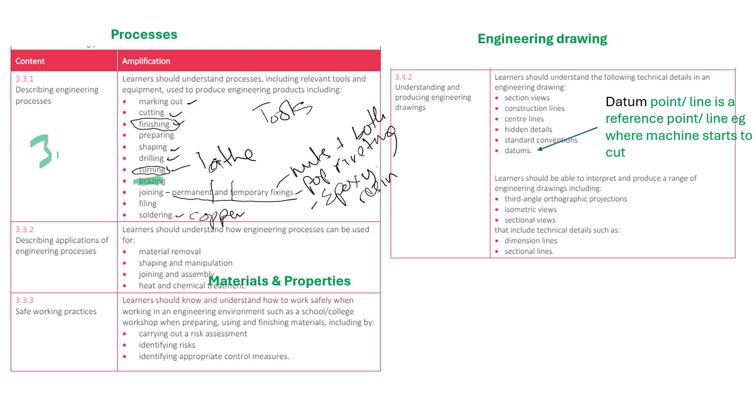The other thing we looked at is this topic about processes, describing application of engineering processes, knowing what processes are used for removing materials. We looked at drilling, turning, filing, and ways of cutting - all ways of removing materials. And then we've spoken about shaping and manipulation, joining and assembling components, whether temporarily or permanently, and heat treatment. We haven't gone through heat treatments in length, but we gave an example about heat treatment being used to improve strength of materials.

Now, one that we looked at was called quenching, and what happens here is you heat metal to a very, very high temperature. You don't want it to melt, but it just reaches that high temperature, and then you drop it in cold water, and that process is called quenching.

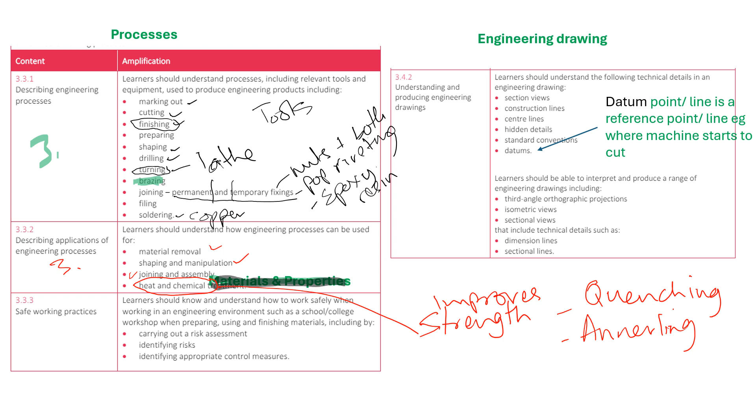But we also have another process called annealing, where you'd heat your metal again to a high temperature, but this time rather than dropping it in cold water to quench, you just cool it slowly, very, very slowly. Some of these cooling processes take time and can be prolonged, but they cool it to an extent that sometimes it reaches the temperature it was before being heated, or they want the temperature to drop even further below than the material was before it was heated. These treatments are called heat treatments, and they improve strength and harden materials - to make the material even harder or stronger than it was.

Now, when it comes to this next topic, which is about engineering drawing, we looked at sectional drawing, which I've given you handouts for. Sectional drawing really is where it shows if a piece of item has been cut - how do you identify that a piece has been cut, and how do you show where a saw blade has gone through? You do that by shading it to show where the saw blade went through. So we looked at sectional viewing.

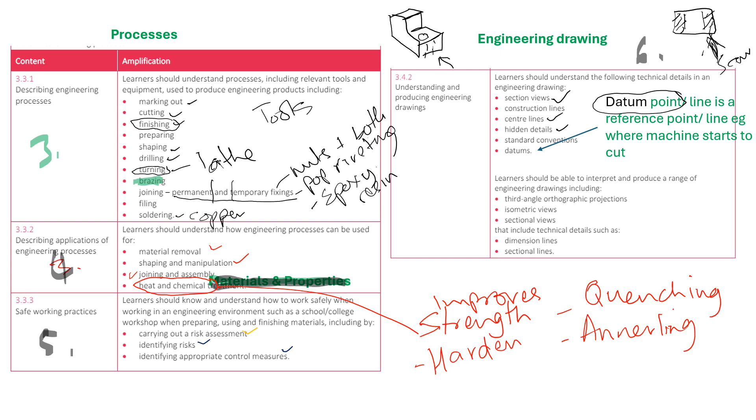Okay, so we're going to start off by doing an exam question. Again, this one is about looking at developments of technology, the influence of engineering in the development of smartphones and smartwatches. I'm just going to give you about 8 minutes to attempt this question on your own, and then we'll get back to it and do it all together. So when you're ready, please stop the PowerPoint now to attempt this question - 6 to 8 minutes would be enough to complete it.

Okay, so make sure you've got a green pen so we can go through this together. Now the question says: the world of engineering is greatly influenced by development of technology. One area that has seen many changes is the use of smart wearable technology. Your task is to discuss 3 significant technological developments that have contributed to the development of watches similar to those shown above. First, you're looking for 3 technological developments. To answer this, I would list those 3 significant technological developments.

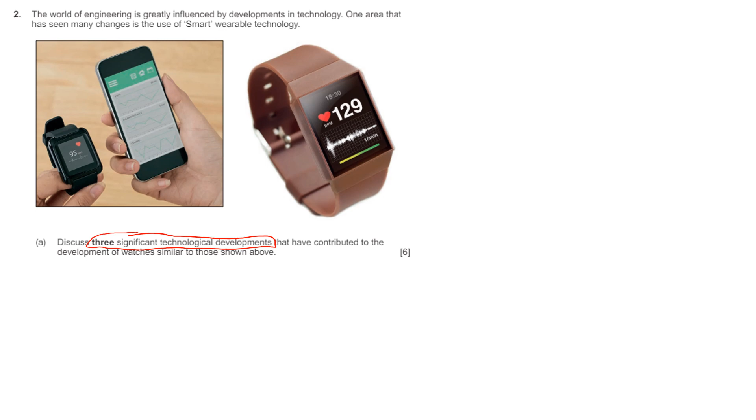Obviously we're looking at smart materials, because if it wasn't for the smart materials on those screens, we wouldn't be getting anything like touch screens. We wouldn't be able to use touch screens on mobile phones. But also, at the bottom here, there's a technology that allows infrared or laser that we use.

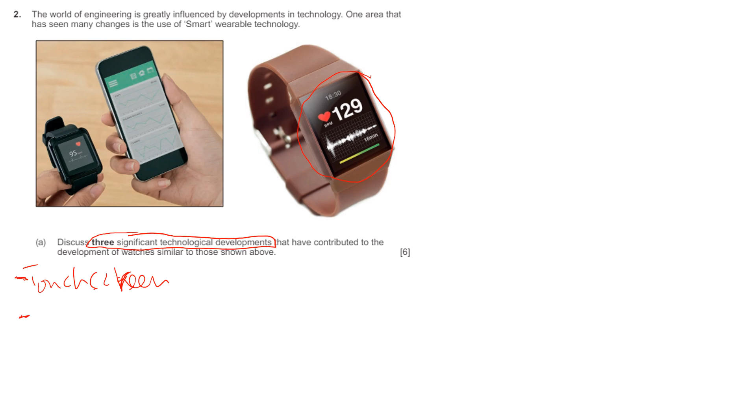That allows you to gauge and measure your heartbeat and so forth. So this is what will come up. Being able to connect mobile phones over to watches has meant a great change in how we use watches nowadays. You don't have to try and pull your phone out when it's ringing, you can just answer through your watch.

We also know that the user can look back at their progress on the applications, or on Bluetooth or Wi-Fi. So again, you don't have to use your phone. We can see how you've been working out all day, how many steps you've done, just by looking at your watch without having to necessarily use your phone.

There's GPS as well that has been used with this technology, which then records your movement. Some sports people do use this - if they're playing football on the pitch, they can use the GPS technology to see how far and how much they're running on that pitch, and which area of the pitch they're spending most of the time on.

We've got where the user can track their routes accurately, and it tells you, you need to start walking, you need to do this, so you're able to track and see how much you've done in a day, without necessarily having to write it down. It does it for you automatically.

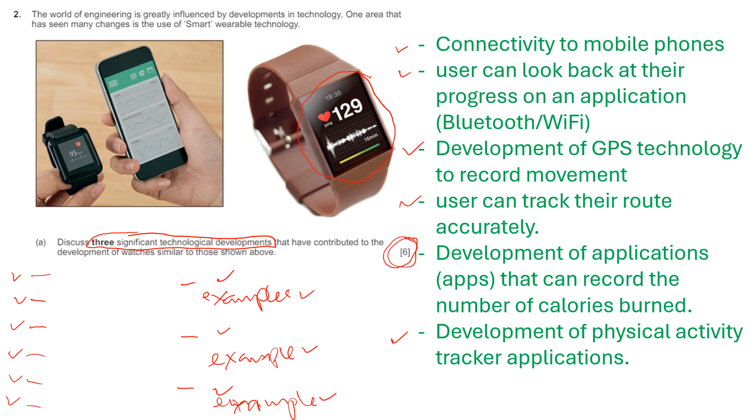Example, example, example under each point, and then you will get a mark for the point, mark for the example, point, example, just like that, which then all adds to 6 marks at the end.

So let's go off and attempt this next question. Again, this one is out of 10 marks, so I'll be looking to see at least 10 points, or 5 points with examples next to them. We're not trying to write in an essay form here. As long as you've listed your points, it gives whoever is marking your work the opportunity - they cannot miss the opportunity to give you a mark for whatever you've put down. So you've got to force whoever is marking your work to give you a point on that. It's a 10-mark question, I'll give you about 10 to 12 minutes to do that on your own.

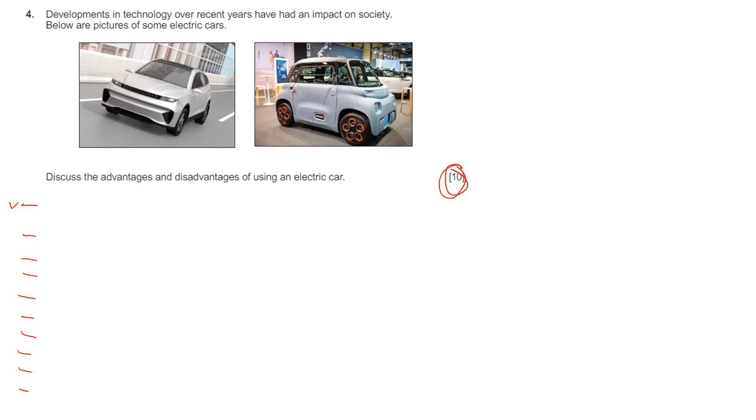Okay, so let's go through the answers. What I'll do here is come up with the advantages first, because it's asking me: developments in technology over recent years have had an impact in society. Below are pictures of some electric cars.

Discuss the advantages and disadvantages of using an electric car. So the first thing we've done here is select the advantages. If you do 5 advantages, then you are guaranteed 5 marks. For example, health and safety consideration during collisions - what you could do for yourself is give an example of what you mean here, so we're talking about things like having sensors and cameras in the cars, which has meant these are safer than the old cars that never had any sensors.

So that would be 1 or 2 marks for giving examples. These cars can also connect to interact with smart technologies such as your phone, so you don't have to pick your mobile phone up when it's ringing - you can just answer straight through the car, which makes it again safer for people driving. And things like lower cost of driving, because obviously they use electricity, which costs less than fuel, and you can refuel them at home.

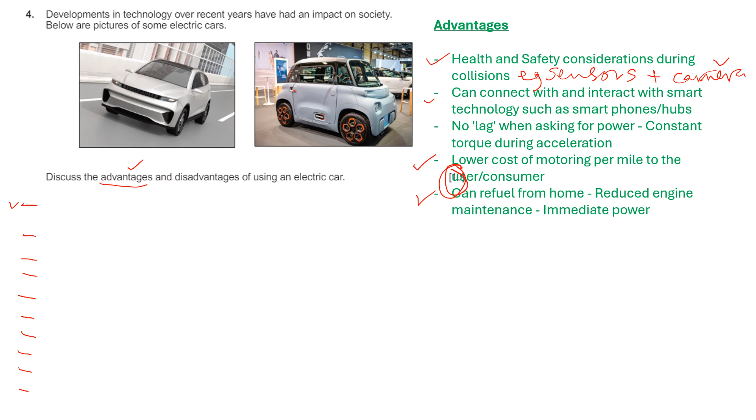You don't have to rely on trying to get to a petrol station to be able to fuel them.

Now the next point here we're going to look at is the disadvantages, and you can talk about unknown processes for battery removal and change. This is the one that everyone is worried about, that what happens if the batteries die, or what am I going to do with my car? I guess everyone is thinking about the same issue.

But also energy cost to charge has increased, so a lot of energy companies now know everyone is starting to buy electric cars, so they're starting to increase the prices of electricity so that they can be benefiting as well. And then this one here about initial purchase cost, we know they're quite expensive, normally much more expensive than fuel or petrol cars, which again is putting people off.

Another worry is that you need to plan your journeys, because you need to be looking for charging points. There's not many charging points around the country, so you need to be planning your journey every time, because you need to stop at some point to charge your car.

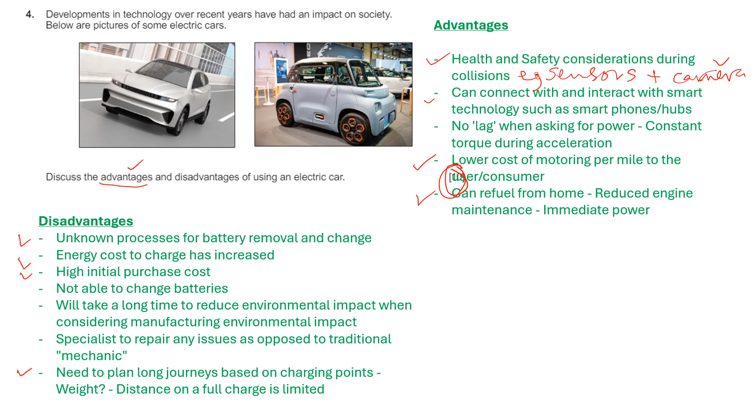So literally, you just look at this, think about personal experiences and think about reality or the life we live in now. When you answer this question, it'll make it much simpler for you to be able to be successful.

So now we're going to move on to tools. Again, this is a question that comes up quite a lot in the exam, where you're asked to name tools and explain their uses. We've seen quite a lot.

Last year it was the digital calipers that came up. We've had soldering irons, tin snips, and so forth and so on. So you need to be able to know these tools.

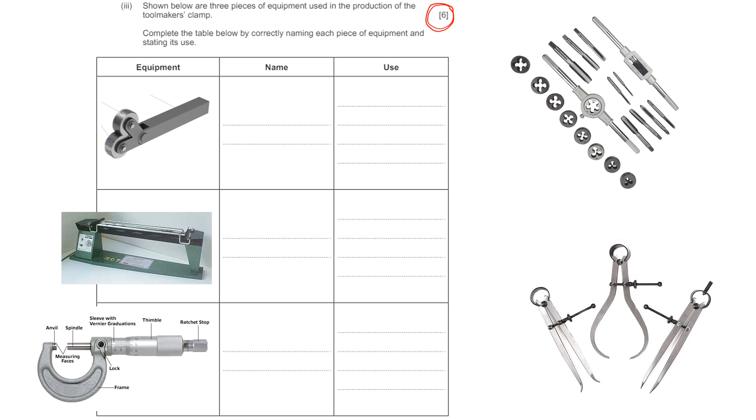So for now, I've just listed a few here that I want to see if you can remember, or if you know. I'm going to give you about 6 minutes for you to answer those. When you're ready, pause. And here's the answers.

This here we haven't done, we haven't looked at. It's called a micrometer. It's like a digital caliper really, but it's used by engineers to measure very small objects, or very small measurements. It's called micro for a reason, micrometer, and it's for those very small, minute measurements.

We've used the line bender, knurling tool on the lathe. We've used a die and a tap quite a lot, but what I'm expecting for you to know by now is the difference between a tap and a die. I do not want to see in the exam people naming this together as one thing, tap and die. You need to know the difference between the two.

A die here is for external threads, and a tap is for internal threads.

And then obviously we talked about the external calipers. If you're trying to measure a cylinder, you use these external calipers to measure the outside of a cylinder, or you could use the internal calipers if you're trying to measure the inside of an object. You just place them on the inside and you'll be able to measure that distance.

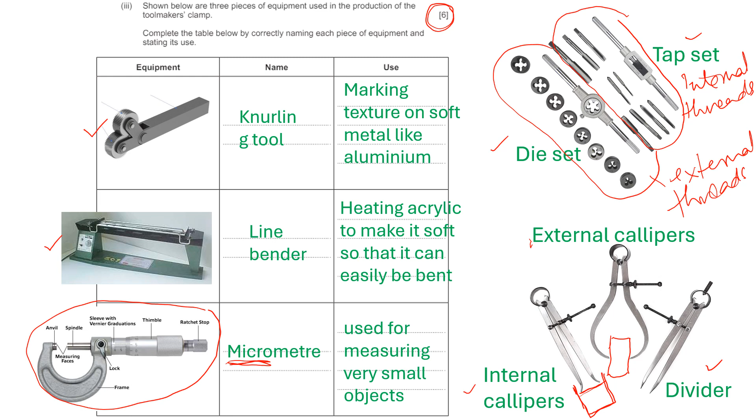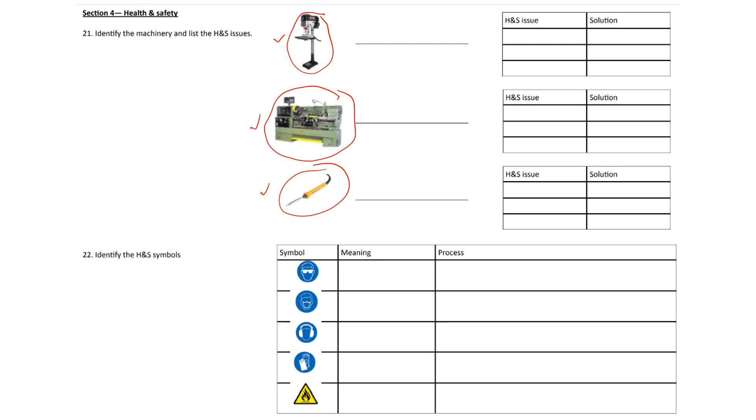And last year we talked about PPE, which a lot of people thought meant the exams, but this one here, it's about personal protective equipment. Things like wearing goggles, that's PPE, personal protective equipment, and that's what you're expected to be using when you are in the workshop.

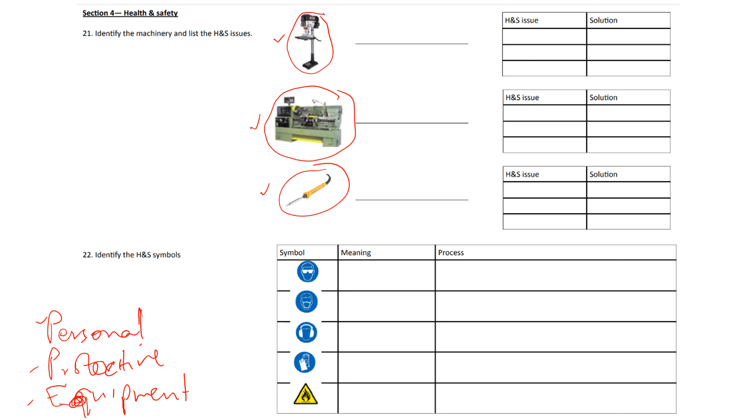And then again here, safety signs and symbols. What do they mean? What are they telling you when you find them in the workshop?

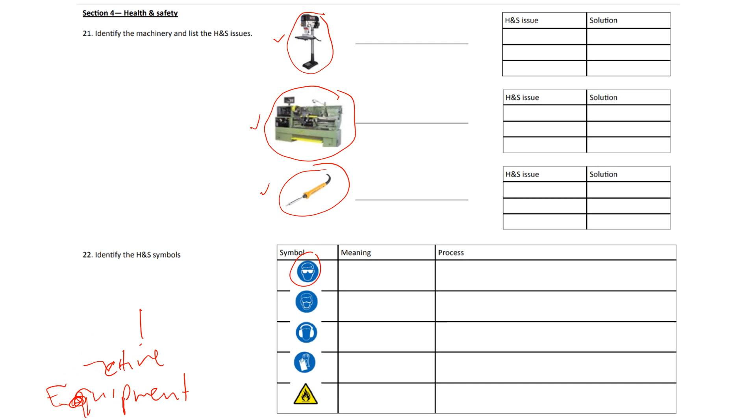So I'm just going to give you again some time to go through those on your own and see if you can answer the questions. I'll give you shall we say 6 minutes again to get that done. When you're ready, please pause the video.